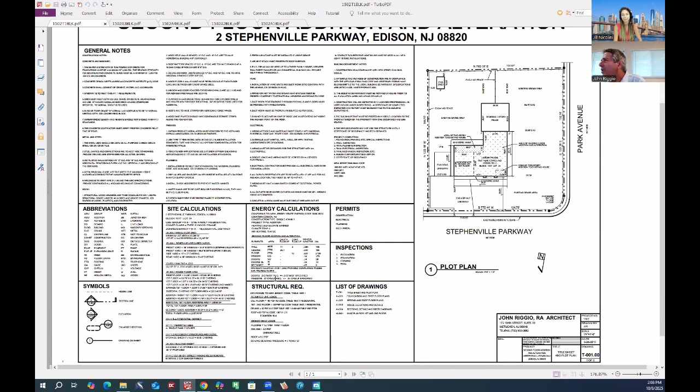Okay, so what we have here is the set of drawings. Let me just zoom it down slightly. So what's happening here is it's on a corner property, and the property is very large. It's over 20,000 feet. The property is coming in at, let me just get an exact number for you - it's 20,187. So it's a nice size house.

So this square in the back of the house is what was originally an addition that is existing. And the balance of the house here, shown with the dots in it, is the addition. There's just a small piece of the house that is still there, and the rest of it is all brand new.

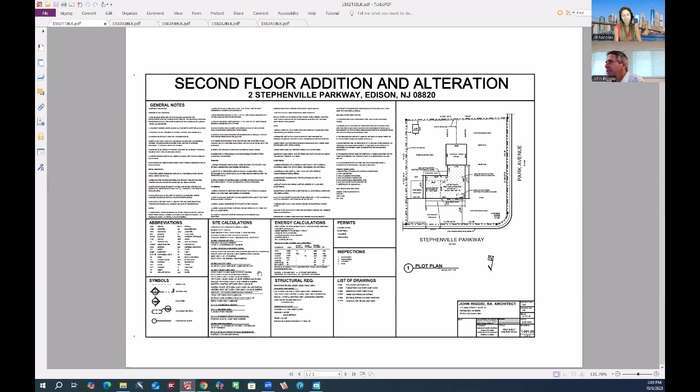This shows here on my title sheet - I always have the zoning calculations, the energy calculations using the REScheck, and then I get the REScheck numbers and put them on the title sheet. I have notes here for the contractor and the building department to meet all the basic requirements.

This here shows the permits that are for the building department, and the inspections are also for the building department. The list of drawings is really for anyone looking at the set of drawings, so they could see where each drawing is - the foundation, the floor plan, elevation, sections. On here, we added some mechanical details that were necessary with this job.

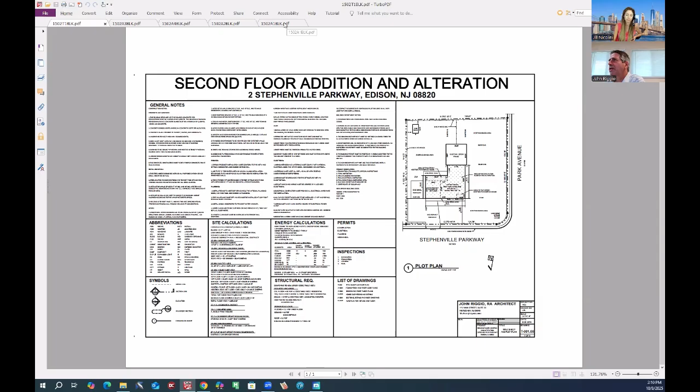Going to the next drawing, this is just showing the foundation plan. To the left side is showing that whole piece of the new house where it has new foundations, and the right side is the existing one-story addition that was there.

Now this house didn't have a full cellar. Some of the houses I've shown before had a full cellar, but this house, even though it was very large, they didn't have a full cellar. Some of that has to do with basic developments - they have a variety of houses, and sometimes it has to do with water underneath the property. If the water table is high, they might just skip the basement at that house location and go with the slab. That's what's shown here.

Then to the right side of the page here is showing the whole new house. So let me just zoom into this.

So what's happening here is now the house is completely renovated. The dashed lines show the old walls that used to exist, and everything else is pretty much removed from the plan. The piece in the back here is a new added storage room.

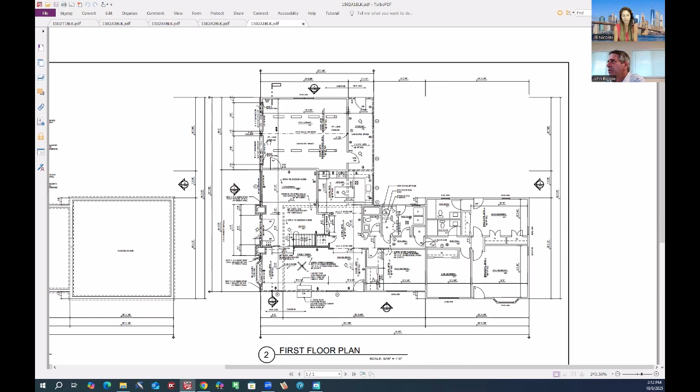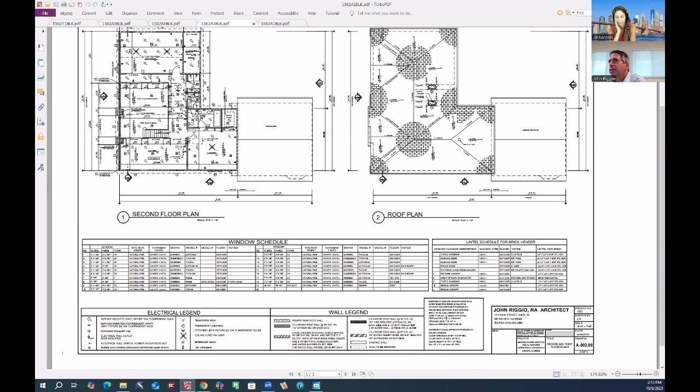This is the second floor. Looking at the page, this shows a window schedule. Since we did a full line of brick, I have a whole steel lintel schedule for the windows, and the usual electrical legend, wall legend requirements for emergency exit windows, which is a newer requirement over the last 20 years. You have to have emergency escape windows in any bedroom.

So this just shows the plan, let me zoom into the floor plan. Now on the second floor, you come up the stairs, and this whole living room space is a completely open area now. What's happening with this plan is it's using some extra square footage and making it into a lot of recreation spaces.

They have one really big playroom on the right side. You come up the stairs, and it has open arches with railings in between on both sides. A lot of them also provide structure for the ceiling and the house.

As you walk around the open loft, you come all the way around to the top part here and can then enter into an entertainment room. The entertainment room is a very nice size, 24 feet by 16, which provides a lot of extra recreation space.

From here you walk through the entertainment room and have sliding glass doors that go to a terrace covered with a roof. It has really nice flooring and detailing in there.

As far as the rest of the plan on the second floor, it's a brand new master bedroom with a master bath and walk-in closet. In the hallway we have an extra three-piece bathroom and a washroom for the clothes with washer, dryer, and slop sink with a window.

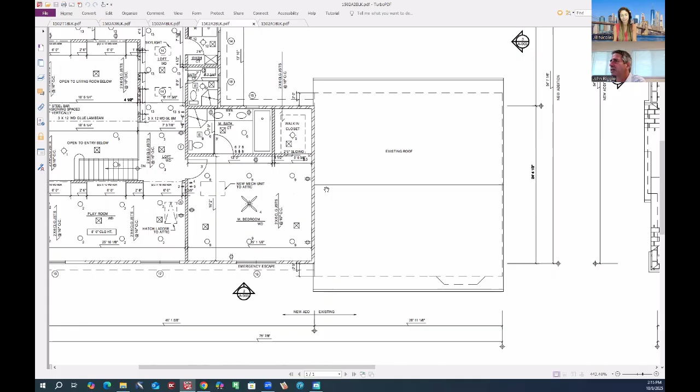Now to the right is showing just that existing roof that's there, so that is going to just stay there - there's no changes to it. Everything else is brand new.

So then going over to the roof plan - this is the roof plan. My style of drawing the roof plan has changed slightly, this style showing the little pieces of hatching of the roof tiles.

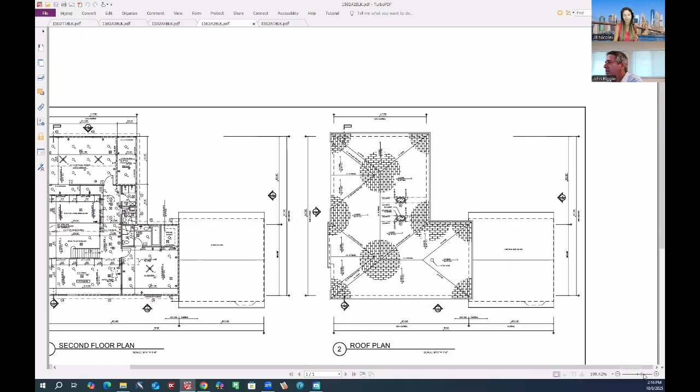It's a little time consuming to do it this way, and over the years I think it looks a little bit like camouflage. So what I did was I don't really detail the roof the same way anymore - I usually would either leave the hatching off to show a new area, or would hatch the full area. It seems to work a little clearer for people reading through the drawings.

This here just shows the roof rafters, the ridge sizes, valley rafters, and some framing around the skylights. This is how it looks here. So let me go to the next page now.

Now this house, one concern about it going back to 2015 was really getting the house warm. So I gave them the idea of using Dryvit, and it added on so much insulation. He added about 6 inches of insulation to the outside of the house. When the job was finished, he was so happy because this gave the house such a warmth in the winter. And in the summer, it kept it cooler with the AC system.

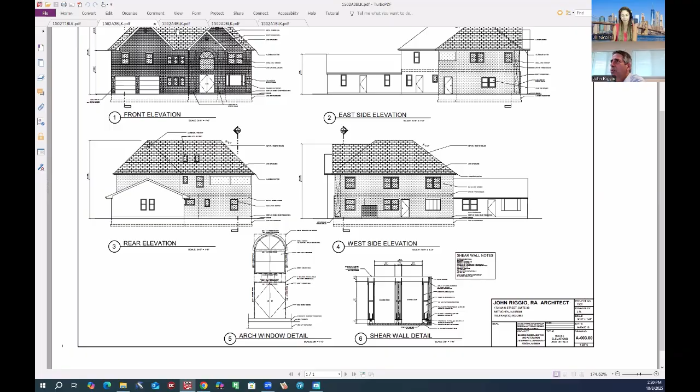So this here worked out very good, and this is just the detail of that shear wall that is a requirement for that type of structure.

Now this here, just on the plans, is very basic plans showing the full thickness of the brick in the front of the house. Just the basic sections are required. I would show the uplift bracing.

The uplift bracing in 2015 was already something that people were used to having to add to the construction of a house, and that's just the uplift bracing. The uplift bracing is really because of the increase in hurricanes, and this is from the new code coming through.

You have to strap the foundation down. You have to strap between the two floors. You have to have what's called a hurricane strap at where the roof rafters meet at the top plate. And then you're supposed to strap also across the top of the rafters where the ridge beam is in the middle. So that provides all the uplift bracing.

And then this is just a nice terrace detail that I put together for them, and it really worked out really good, showing the moisture barrier here, ceramic tiles where the water is going to drain out. I put a drip edge in there. So everything is on there with the drawings.

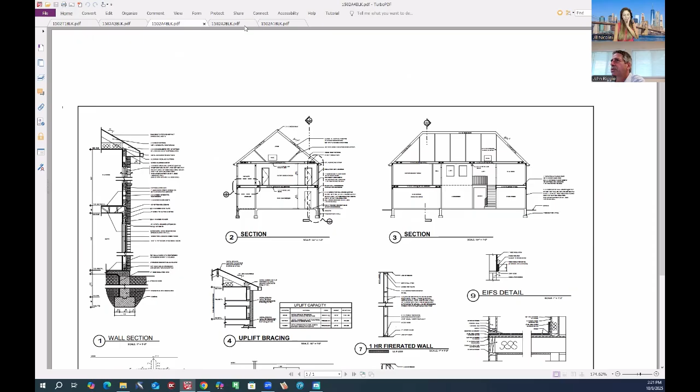And let's just go to the section page. Okay, that's good. Okay, so let me just head over to the pictures now.

Okay, let me open the pictures first. Sure, sure, sure.

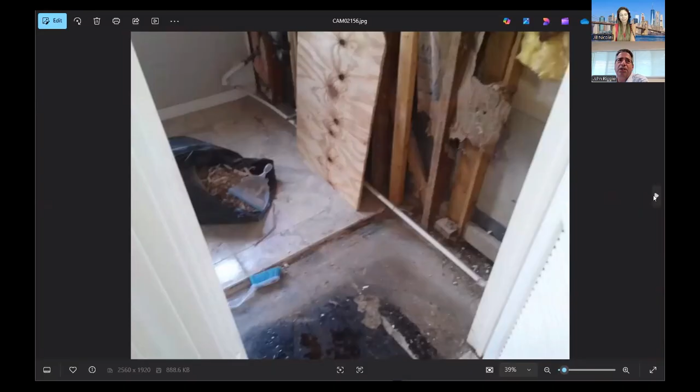Now this shows inside the house. This is just miscellaneous pictures during the construction, where that fireplace insert is, and this is just the start of that construction. This is during construction of the house, showing some areas of removal of the old areas. This is the new areas of the structure.

Now this has new PEX piping in it, the plastic piping - it's color coded for hot and cold water. So this house was pretty good with some new technology taking place, and the PEX piping was really something new, just coming out. It's standard now - a few people still go back to the old copper pipes, but PEX piping is really standard.